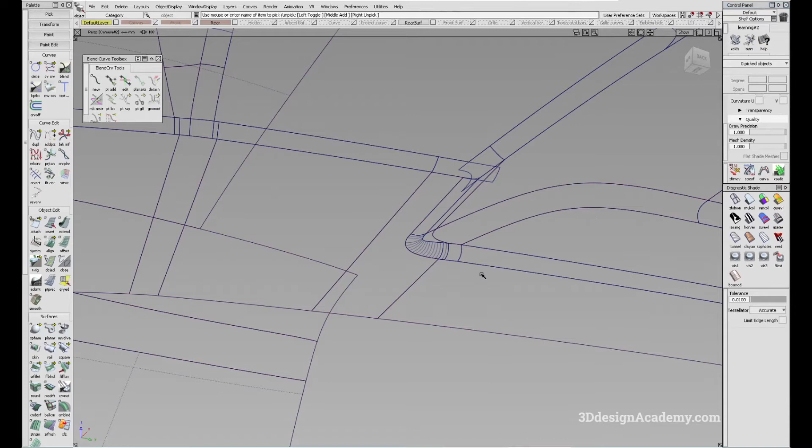In this lesson, we will continue with part 185 of constructing the car project. Okay, so continuing on from the previous lesson, I'm going to be working on this fillet over here. Now, you'll notice that there's this area and this area that we need to work on. I do think that this is going to be a much more difficult area, so I'm going to tackle this one first and leave this for a little bit later.

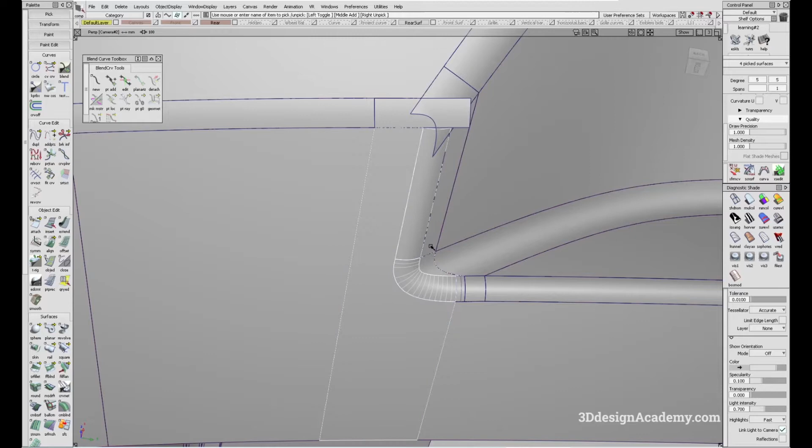Okay, so in order to start, I do want to simplify these surfaces a little bit. So what I'm going to do is I'm just going to grab all these and I'm going to hide unselected so that they're not in the way. And I'm going to do a little bit of modification. So you'll notice that because of the tangent, how this fillet is constructed, it's not lining up. So let me just do a little bit more refinement.

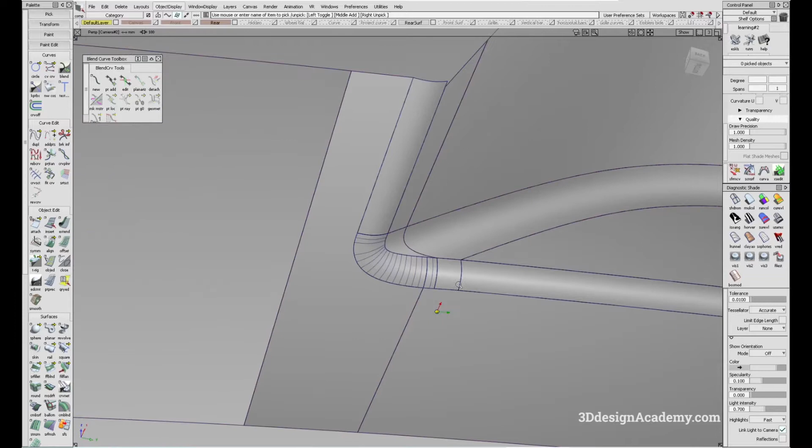I'm just going to grab this one also, and I'm going to untrim this piece over here, and I'm going to untrim this one over here. So you'll notice that the tangent line is a little bit off, so let me just start by cleaning that up. Actually, let me just untrim this first, like this. I'm going to untrim it a little bit more. Oh, actually it's a little bit short.

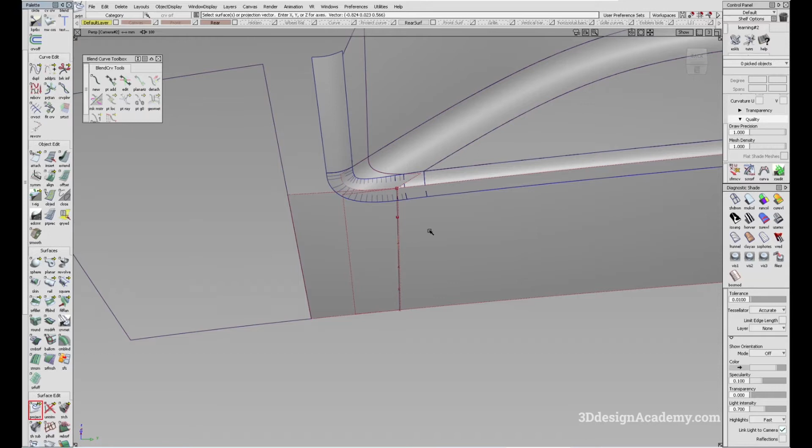Okay, so that's fine. What I'm going to do is I'm just going to extend this piece so that it's a little bit longer like this, and I'm going to get rid of the curve on surface over here, and I'm going to duplicate this one over here. I'm just going to align this piece over here like this, and I'm going to project this one over here, and I'm going to trim. Okay, so that's fine. Let me just untrim and retrim.

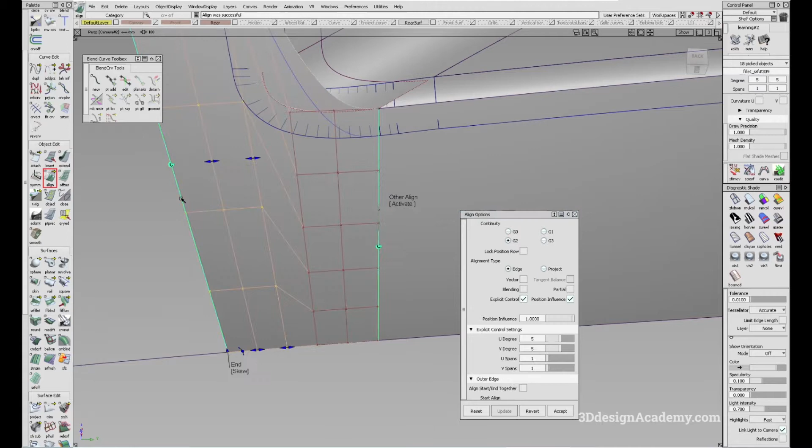Now the current surface over here, I'm going to delete, and I'm just going to trim it this way, like this. Okay, so right now you'll notice that the surface is a little bit long. This fillet is a little bit long, so I'm just going to bring that back by a little bit. And I'm just going to align this piece, make sure that it's good. And I'm also going to align this piece like that. And because it's a little bit short, I'm going to extend it back out like that. So, okay, that's good. And now this fillet is matching up nicely.

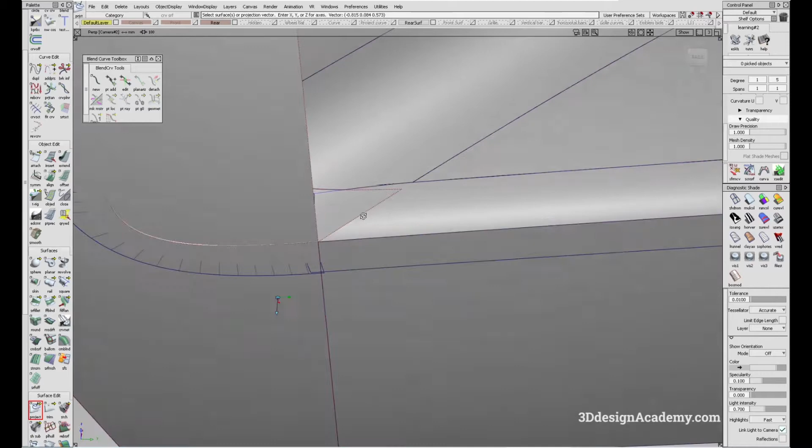Okay, so that said, it's matching up here, but you'll notice that this fillet needs to go like this. So I'm just going to extend this piece over here like that. I'm going to delete the curve on surface over here, and I'm going to project like this. And well, actually, you know what? Let me see if I can just redo the fillet. Now this fillet was a chord length of 5, so let me just delete this piece over here. I don't need that anymore.

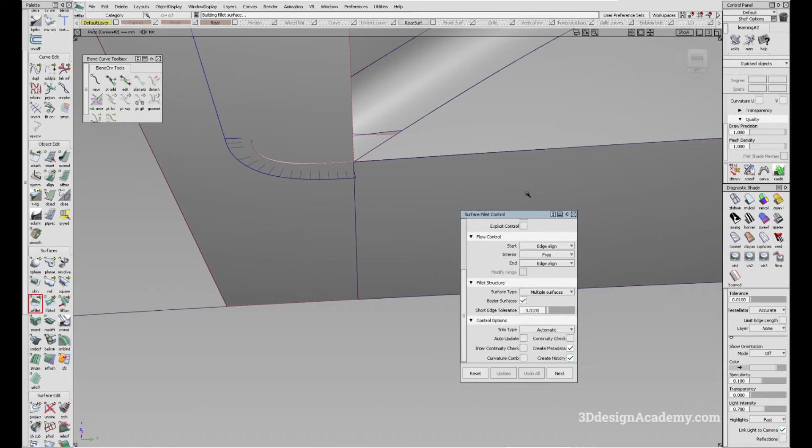I'm going to get rid of this curved surface over here, and I'm just going to do a chord G2, and it's going to be 5, form factor 1. It should be edge align on both sides. I'm going to turn Bezier surface on. And we got a nice fillet over here. Okay, so it's a single span. Everything looks pretty good. And I'm just going to turn the symmetry on, make sure that it is curvature across the center, which it is. So that's excellent. I'm just going to delete the construction history like that. And now let's move on.

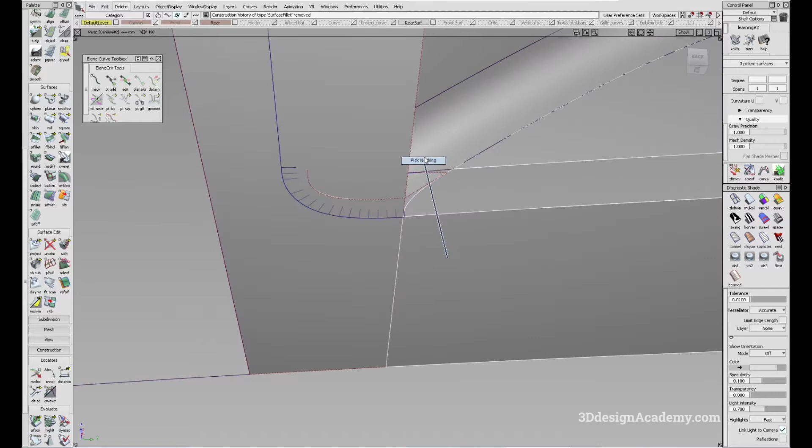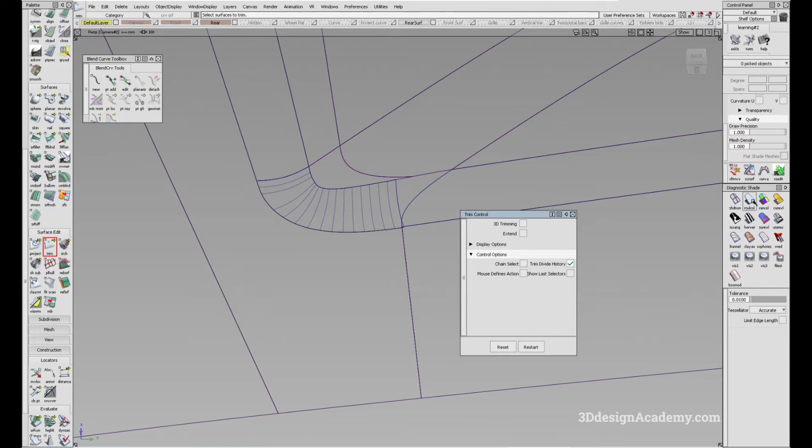Okay, so next thing I have to do is I actually have to create a fillet over here. Something a little bit more difficult about this piece right here is, let me just delete this piece over here and just trim away like this. The problem is, if it was just a single piece, it would be somewhat of a standard ball corner. Even though you would have to manually build it, it would be somewhat standard. But the problem is that there are two surfaces, so that's going to make it a little bit more challenging.

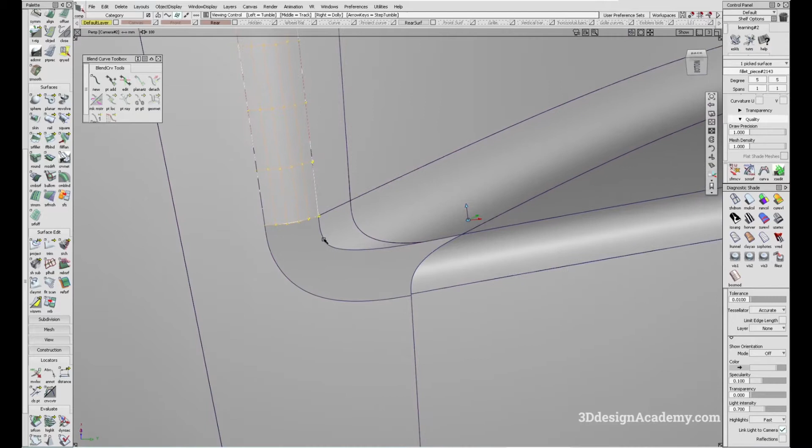However, I'm going to delete this piece over here, and I'm going to try to align this so that everything is a little bit easier to work with. So let me just extend this piece like this, and I'm going to just create a rail. So I'm going to connect.

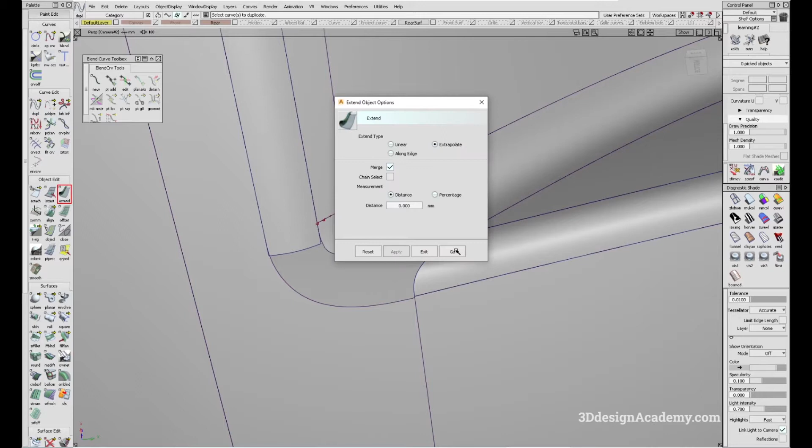Here's what I'm going to do: I'll duplicate this edge, extend this curve like this, and project normal like this. Then I'll trim, or not trim, convert.

This piece I'm going to hide just in case I need it, and I'm going to untrim this piece over here. I'll delete the curve on surface over here, and project align this piece over here, so I'm just going to project a line.

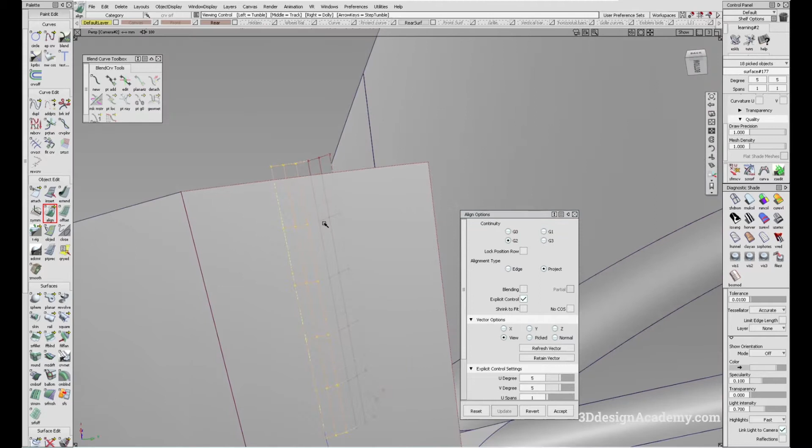It's going to be, oh okay, so it's a little bit short. That's okay, I'm just going to extend this piece like this. Now let's try it again.

I'm going to just project view, should be okay. Let me just trim this piece over here. I'm just going to extend this curve on surface over here, and trim this one over here.

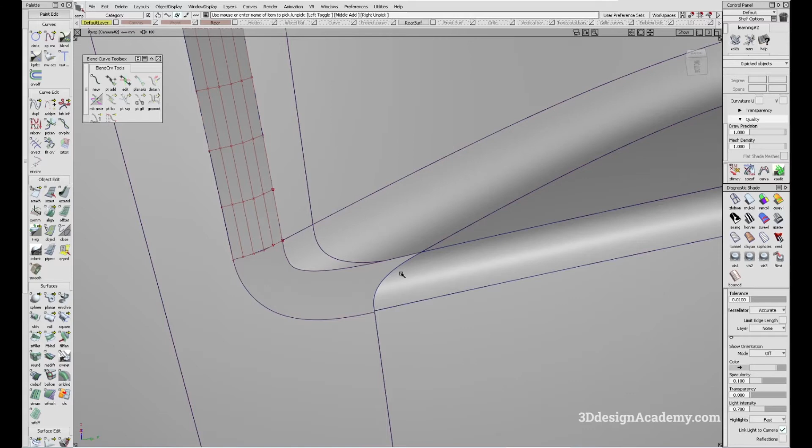Now, here's the challenge: I need to create this fillet over here that's going to connect this one and this one. In order to do so, I think I'm going to try something a little bit different.

So this is the primary surface over here, and I'm going to extend this just a little bit.

So what I'm going to do is extend this piece over here like that, extend this somewhere in here like this, and I'm actually going to grab these two.

I'm going to untrim this piece over here like this, and untrim this piece over here like that. Now the curve on surface, I'm just going to delete for now.

And I'm going to do the same thing over here, delete this curve on surface and this one over here. I'm just going to hide it for now. Okay, this curve on surface.

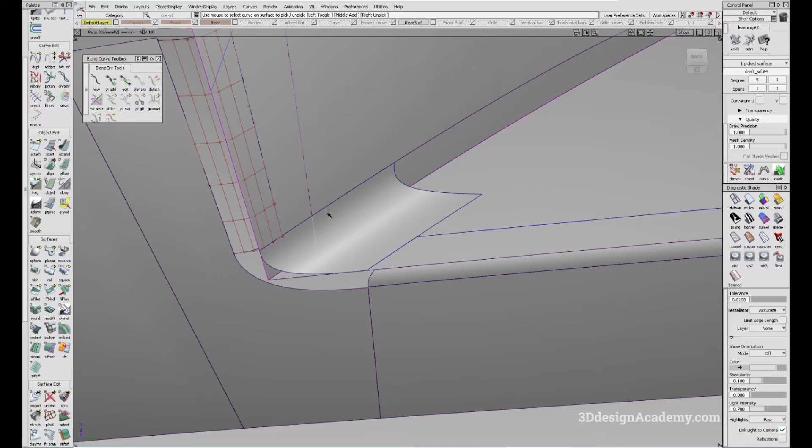Well, let's get rid of it for now. And I'm actually going to hide this fillet also, like this.

Okay, so here's what I'm going to do: I'm just going to create a curve that connects between these two, and make a ball corner. Not a ball corner - I'm going to do a trim convert on that one.

In order to do that, I'm just going to do an insert. It's going to be a curve on surface over here. I'm going to just snap it somewhere over here - it doesn't have to be super exact.

I'm just going to duplicate, get rid of the curve on surface over here, and align this piece over here like this. Make sure that's a curvature, and align this piece over here like that.

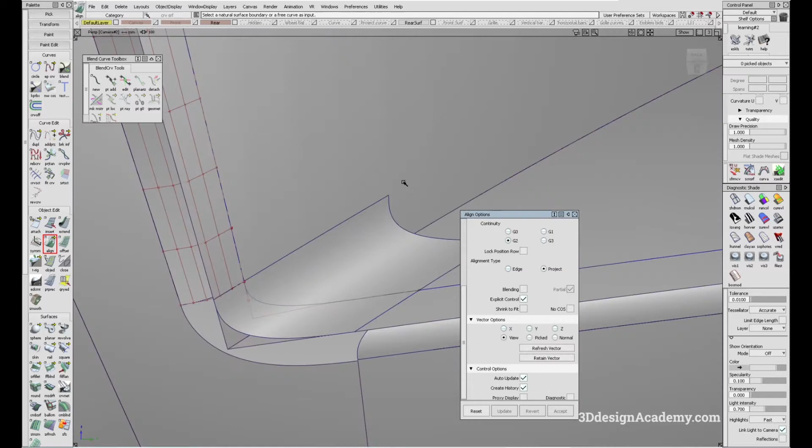I'm just going to make sure that the CV structure between these two are the same, so a little bit extension here and a little bit extension here so that they are matching. This one on the other end looks pretty good, so I think I can leave that as is. Now I'm just going to do a project over here, and a trim convert here like that.

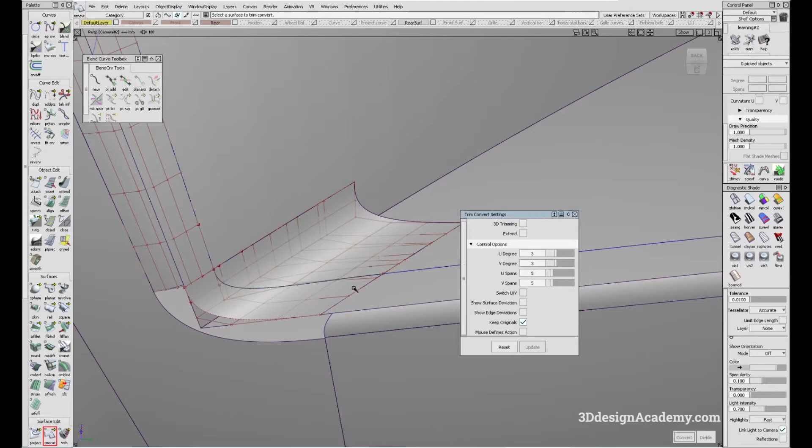Okay, so that's good. I'm going to get rid of the curve - well actually, I might just keep it. Let me just hide it over here. So now this piece I can also hide, and I'm going to just align this one over here.

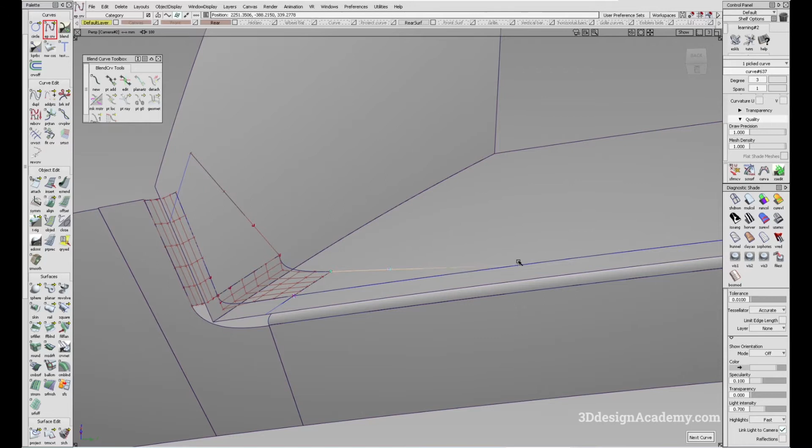Now, because it has to be edge aligned, I do need to trim these surfaces. I'm just going to roughly trim it, grab it like that. Now this side really doesn't matter, so I can just roughly make sure the patch is okay. I'm just going to trim this piece over here like this.

Oh, it looks like we need more curved surface, so I'm just going to extend this curved surface like this over here. Okay, it looks like it's a little bit off, so let me just use... well actually, you know what, let me just do a fit.

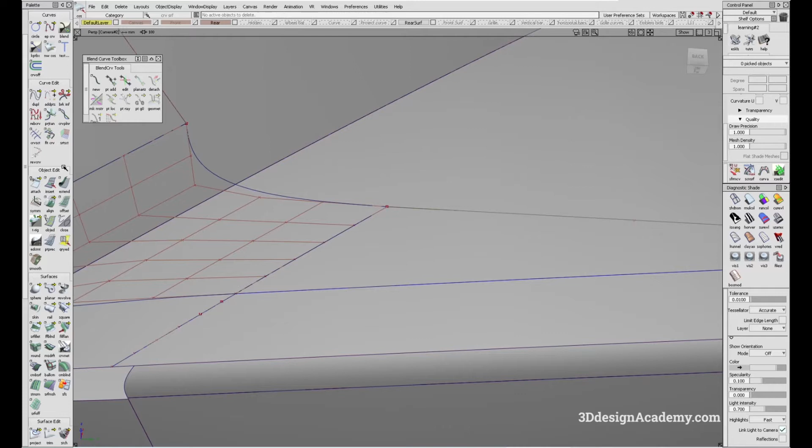Well, actually, you know what, I'm just going to do duplicate. I'm just going to extend this piece over here like that, this curve, and project like this. I don't need that anymore, so that can be gone.

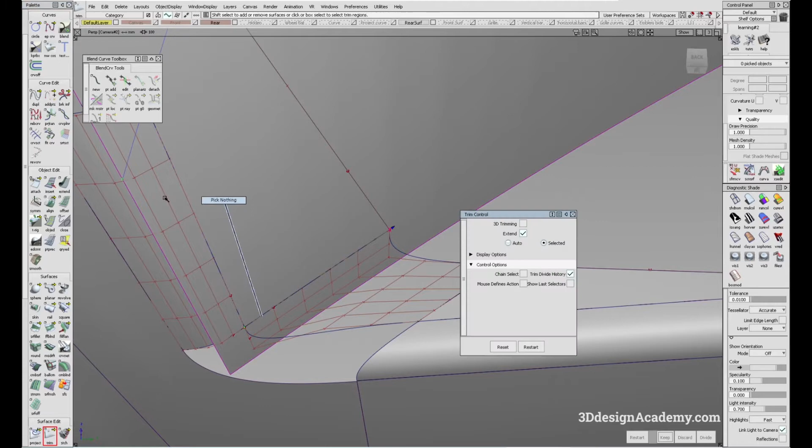And I'm going to trim this one over here, and do the same thing over here. I'm just going to trim this piece over here, and I'll have to project this one also. I'm just going to trim this piece, and that looks good.

Okay, so now let's do some align - it's going to be G2, edge over here. Now this one you don't want to touch - I mean you can, but it doesn't really do anything for us.

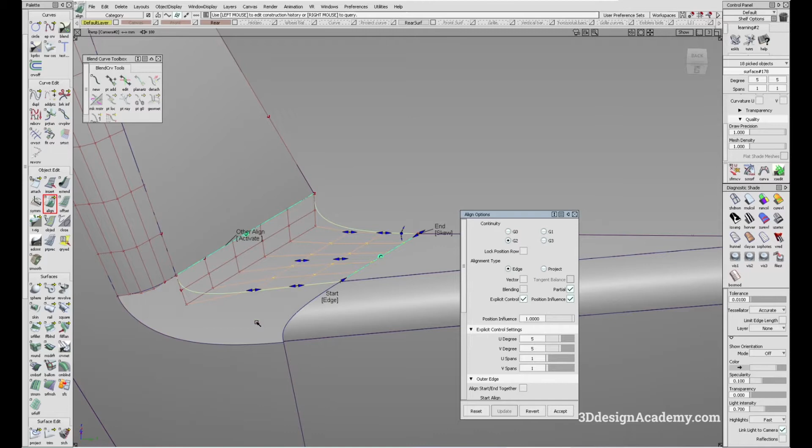And I'm going to do the same thing over here, edge over here. So now we know that it's curvature on both sides, and the edges are aligned. So that's ready to go.

Okay, so now let's create this curve over here. I'm just going to untrim this piece over here - not untrim, get rid of the curved surface over here. And I'm just going to duplicate the curve.

Well, actually, you know what, I'm not going to do that. I'm just going to grab all these. These curves can be gone.

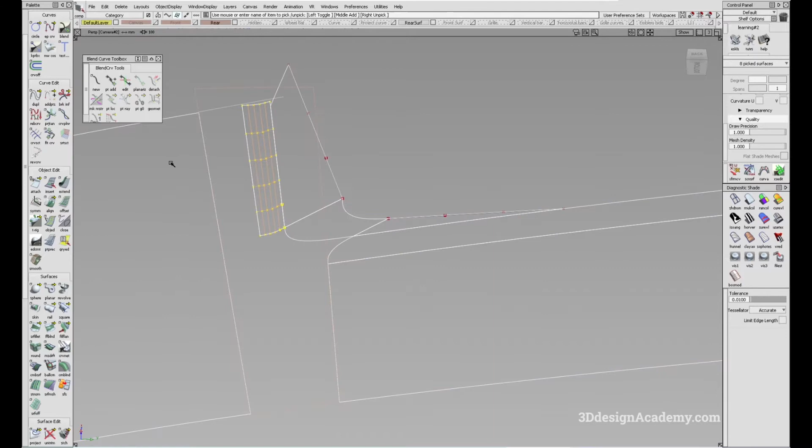I'm just going to grab all these curves or surfaces. Did I delete them? Or did I just hide it? Okay, so I just need this edge, so maybe I'll just use that.

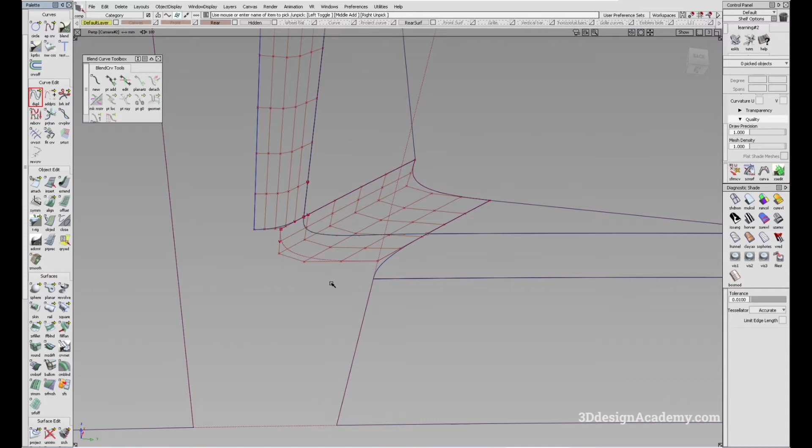Okay, so I'm just going to duplicate this edge. I'm going to say hidden. That's good, I can get rid of it. That's not a problem, I'm just going to align. Actually, let me just align it over here or snap it over here.

I'm just going to extend this piece like that. I'm going to extend it back so that the length is the same, and I'm just going to align. So it's going to be G2 on this side, and it's going to be G2 on this side.

And now we are ready to make a square. So it's going to be 1, 2, 3, and 4. Now let me just make sure that this is aligned.

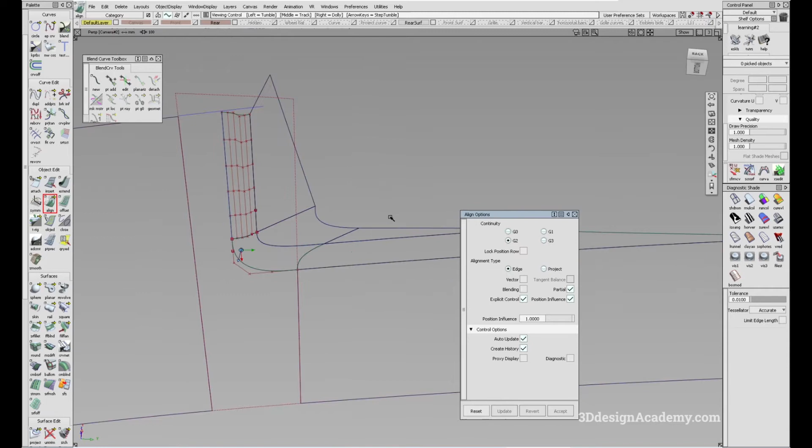So I'm going to grab this piece, it's going to be edge. I'm going to grab this piece, make sure that's edge. Oh, that's not good, okay, so I'm just going to leave it like that. And looks like that's not good either. Okay, so I'm pretty sure I aligned it, so I'll just leave it like that.

Okay, now I'm just going to do a square. So, actually, a square is already made. So 1 is going to be curvature, 4 is going to be curvature, and 3 is going to be curvature. Now, it looks like it's a little bit messy, so now I'm going to do explicit control.

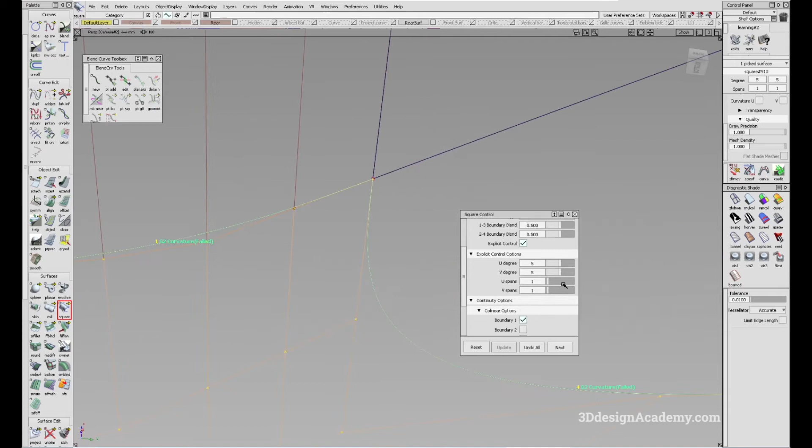Continuity options on, 1, 4, and 3. The surface looks like it's not making curvature, so let's find out why. It could be because the surfaces are flat.

If you notice, I think this one is flat. This, I believe, even this one is flat, so I think that's probably the reason why it's doing this. But let's do a continuity check. Okay, so I don't know how much it's failing by, but looks like there's a little bit of curvature deviation going on there.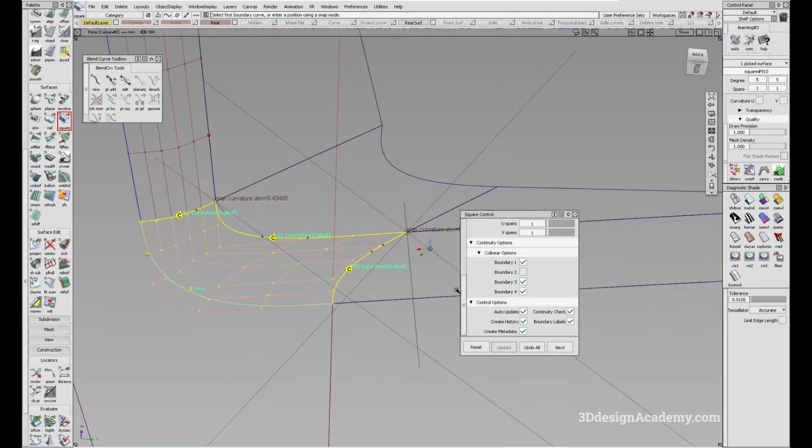That said, however, I do want to make sure that the CV structure is a little bit better, so let me just do that. And let's find out one by one how much it is off by. So that's off by 0.40. That's 1.0, so I think that should be okay.

It's not perfect, but let's try this, try to match this a little bit better. Okay, so I'm just going to grab this one like this, and I'm going to grab this CV over here.

In UV, I'm going to set it to 50,000 so that I can do a little bit more sensitive move. Looks like it's going the other way, and I think I actually need to do 5,000. So let's see if I can get it to be curvature.

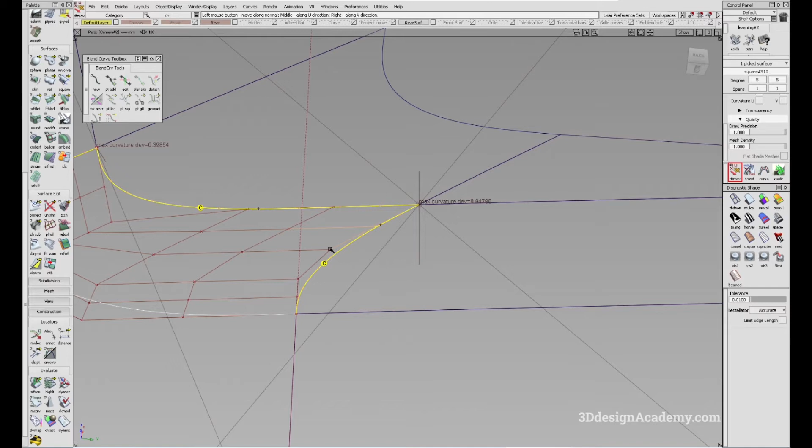Okay, so it's trying to fail tangency. Going the other way, okay, so we got curvature there. It's 1.0, so I'm not going to touch that point. And I'm going to do the same thing over here.

Just going to grab this one. It's curvature over here, I think that's actually failing a little bit. Let's see. Okay, so you know what, I'm just going to leave it. Actually, you know what, let me see if I can just do the same with the curvature over here.

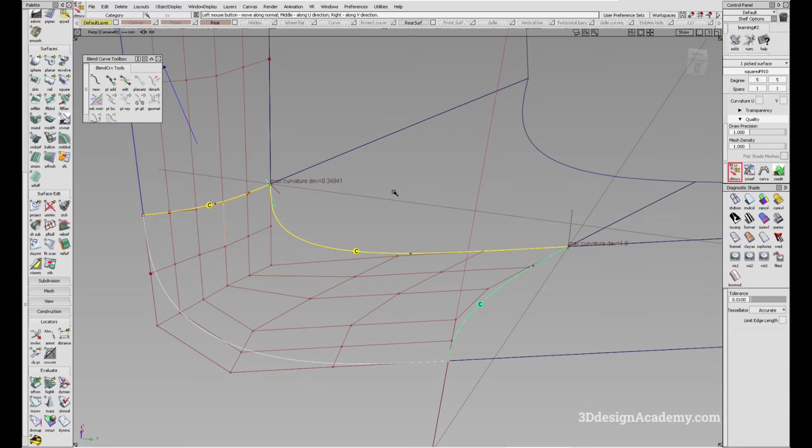No, that's not working, so I'll just change the tangency CV over here. Okay, I would say that's good enough. And I do need to make sure that this is also good. So I'm just going to align, project.

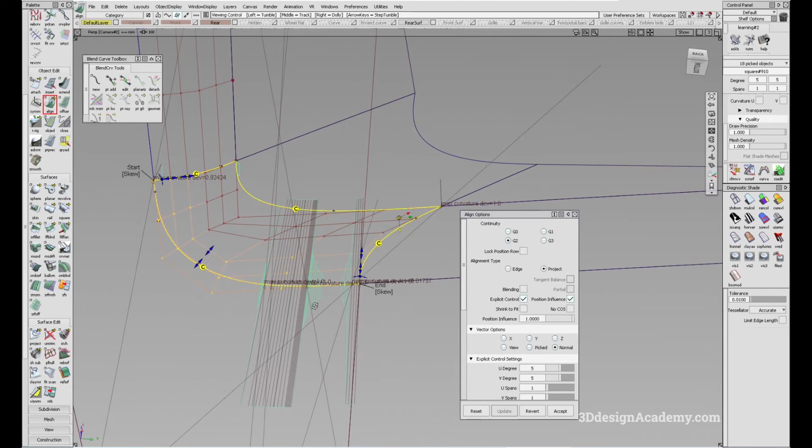It's going to be normal. Okay, so it looks like we got a bunch of issues over here. Okay, so at least this side is 1.0, so I'm going to just leave it. That's, I cannot say the same thing about this one over here.

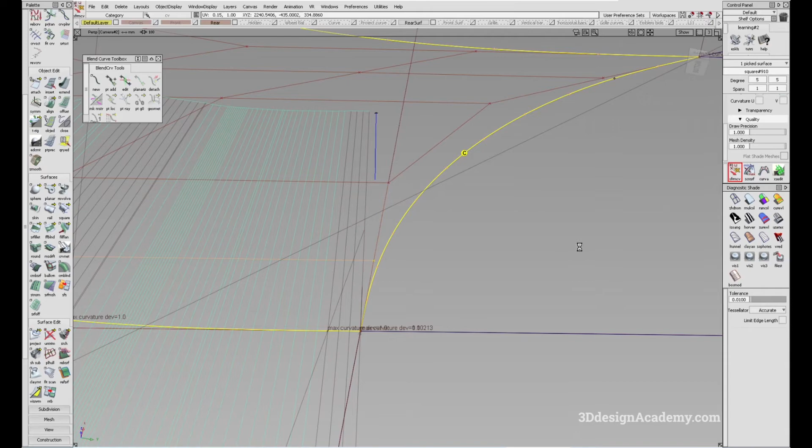So let me just grab this CV like this and try to get this to line up. Okay, so we got curvature there. It's 1.0, so I'm not going to touch that. And this one looks like it needs a little bit of adjustment. So let's...

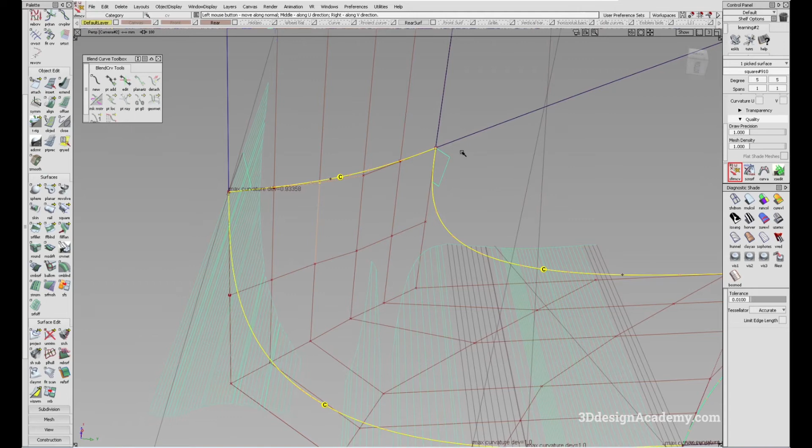Okay, so it looks like it's starting to fail. I don't know why it would be failing by that much, but I don't think this is gonna work. So I'm just gonna leave it like this. I know it's not perfect, but let me just check the highlight and see how it looks.

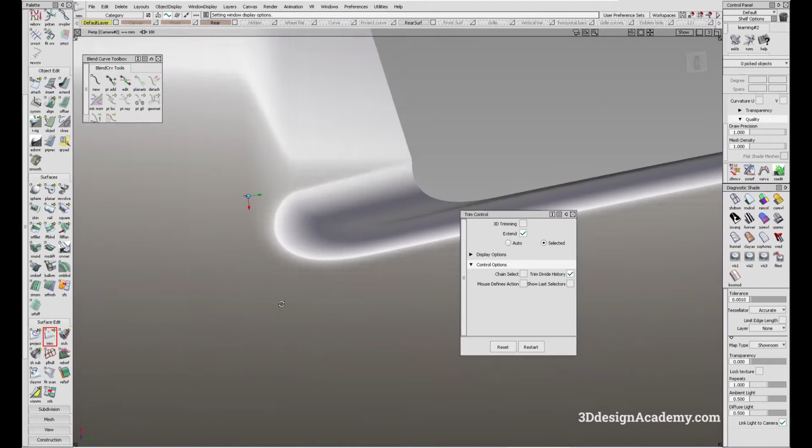Highlight wise, I think it actually looks pretty good. Let me just reduce the tolerance a little bit more, and you'll see that it's actually really smooth. So the problem, while we have the continuity as far as the number goes, it's not perfect, but I think this is actually not that bad.

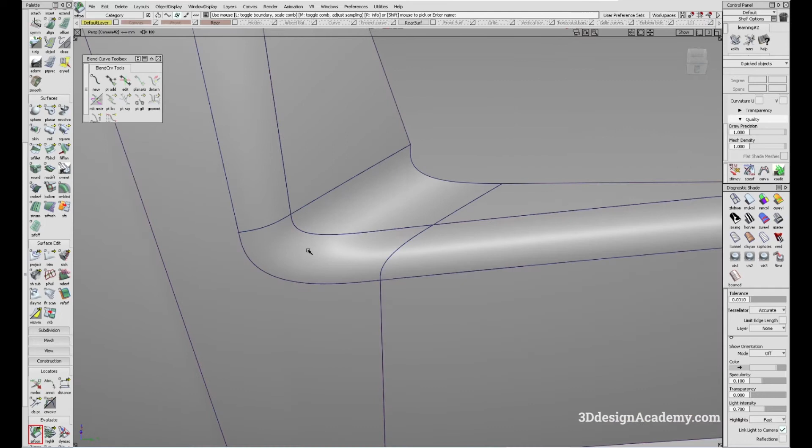It's 1.0 here. We were able to achieve curvature here. So I believe this is curvature, and this is curvature, or it's supposed to be. It's 1.0, so I'm just going to ignore. That said, however, I do still need to adjust for this one.

So first of all, what I'm going to do is, well, actually, I think I should trim this away. So let me just project like this, and I'm going to trim this one, and make sure that... okay, that's an issue. Okay, so it's actually tangent, which is not what I expected.

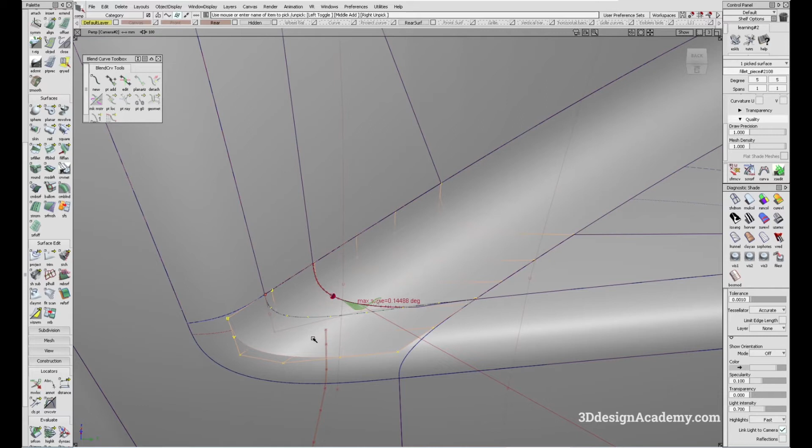So let me just put this in the hidden layer, and I'm going to bring this one back. The only problem is, if that's the case, I believe this might be a bit of an issue as well.

Okay, so let me just delete the curve on surface over here, and I'm going to just project over here, and make sure that this one is okay. So I'm going to say normal. This one I'm going to say normal as well.

I'm going to check the continuity, and it looks like it's failing. Okay, so what I'm going to do is just trim this piece over here like this. And this one I'm going to copy and paste over here like that. And now I'm going to detach this piece over here.

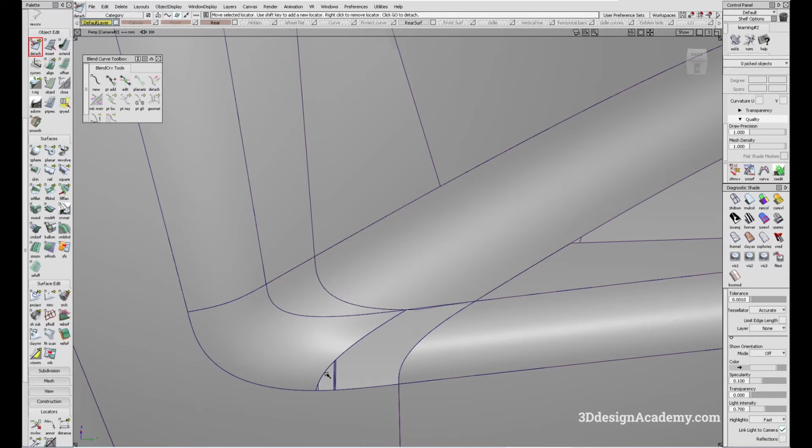So continuity is going, I'm just going to do that, and make them into separate pieces like this. Okay, so that needs to be adjusted, as long as it doesn't crash. Okay, so I'm just going to change that to 0.01 instead of 0.001.

I'm going to save for now. Okay, so now let's see if I can get this to work out. So this actually needs to be curvature, or at least tangent.

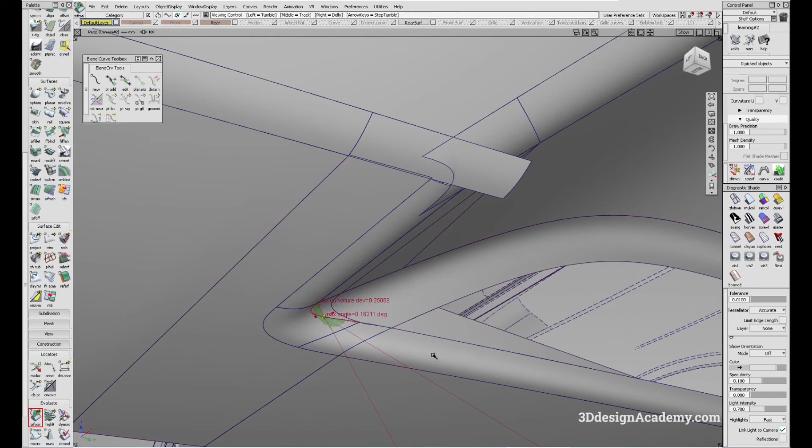First of all, let me just isolate the surfaces like this, and this one, and this one. I'm going to say hide unselected. And right now there's a little issue over here. I think because it was actually aligned to a trim converted surface, it's not actually working as well as I had hoped.

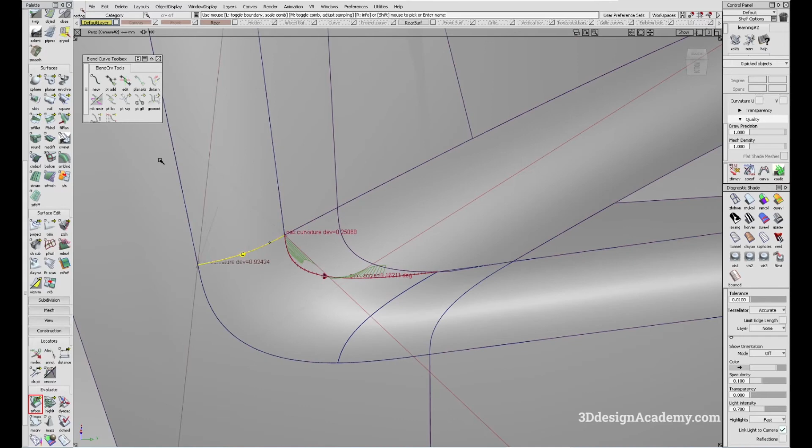Okay, so now I'm just going to align this piece over here like this. Okay, so we got curvature there, so that's good. And I'm going to see if I can get curvature over here. Oh, we got curvature over here, so we got two sides as curvature.

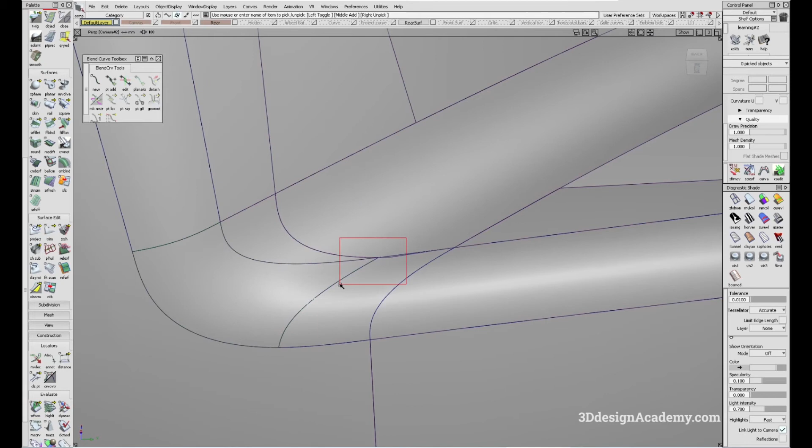That's 1.0, so I'm just going to ignore. That's actually pretty good. So let's do this side. Okay, it's curvature over here, but the problem is it actually has to fit curvature over here.

So let's try it. I'm just going to delete that. I'm going to make sure that this is, it's 1.0, so I'm going to ignore. And this one I'm going to just... okay, so looks like that's a bit off. So at least we got tangency.

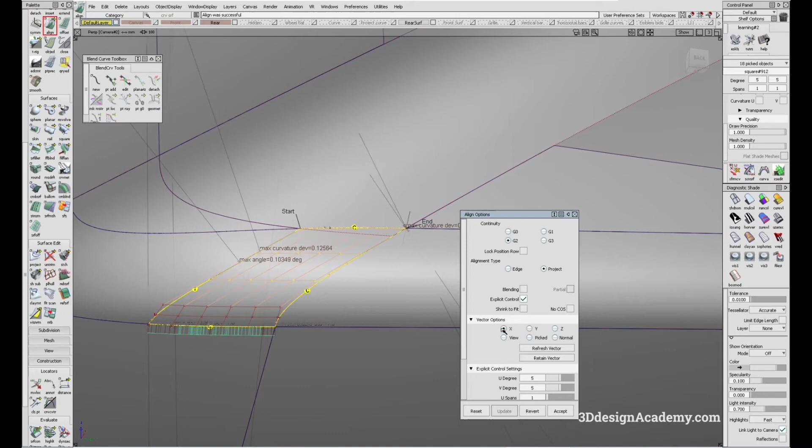Okay, so I'm going to say X. Y is not going to work. Z, nope. Okay, so I'm going to just say view, and let's see if I can.

Now, it is kind of inevitable because of the CV structure, how the CVs are structured. That said, however, I'm going to try to fit it as much as possible. Okay, so I'm just going to delete the construction history over here.

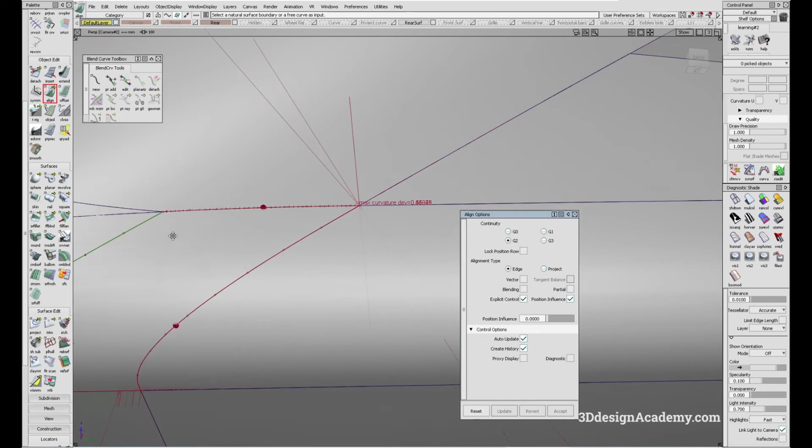It's failing curvature over here, so let me just try to get that adjusted first. So I'm just going to grab this one, align, and try to align this piece to over here. I think that seemed to have worked. So that's good, so it's only this corner that needs to be adjusted.

So let me just try aligning this piece to over here. At least it's lined up over here. So it's this one that needs to work. So let me just grab this tangent CV. Oh, there we go.

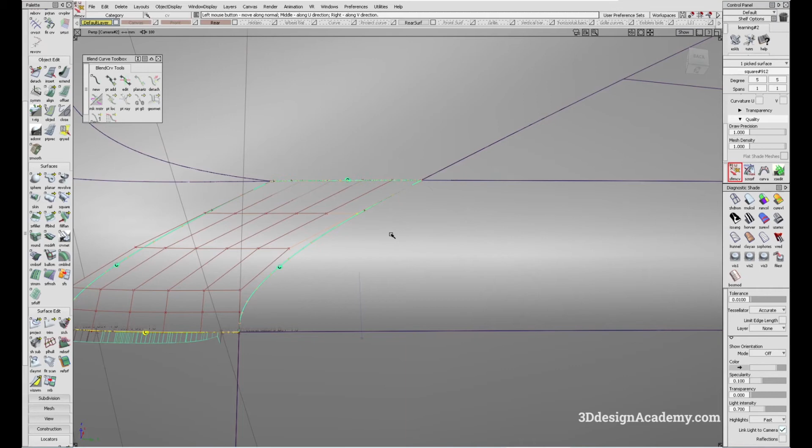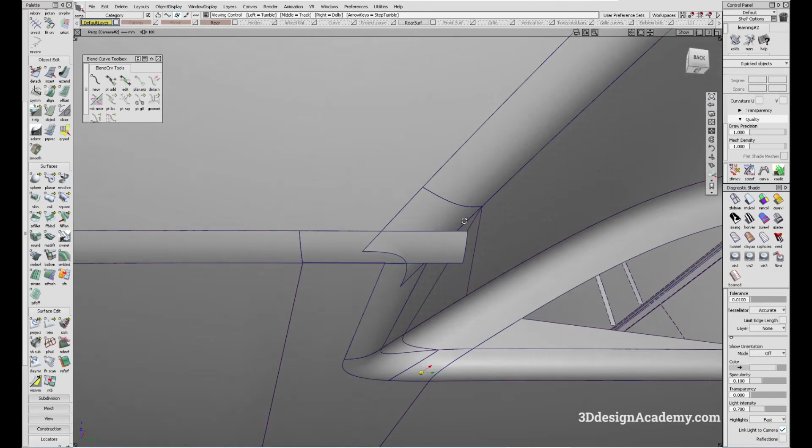We got curvature. That was actually a lot better than I had expected. Highlight looks pretty good, and we got curvature on all sides. Except for this one, but it's 1.0, so I think I can ignore that one. Okay, pretty happy with that. That was a very difficult area, but I was able to make it work, so I'm pretty happy with that.

Okay, so that said, however, this all needs to be adjusted. So let me just project like this, and I'm going to trim this piece, and let's see if the continuity is still good. It is, and this one should be relatively easy.

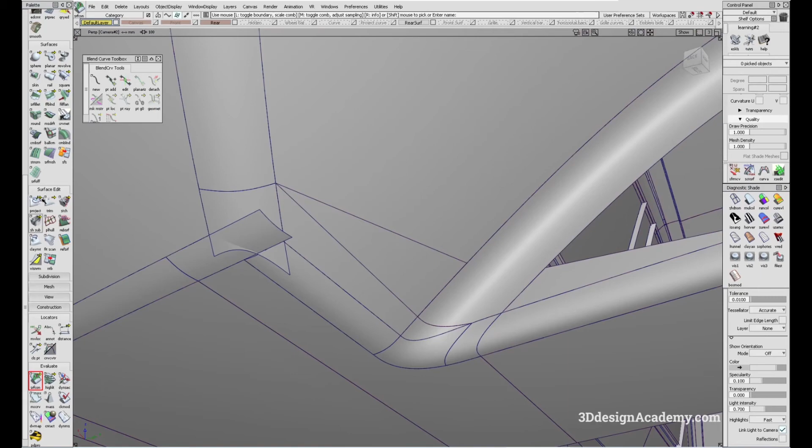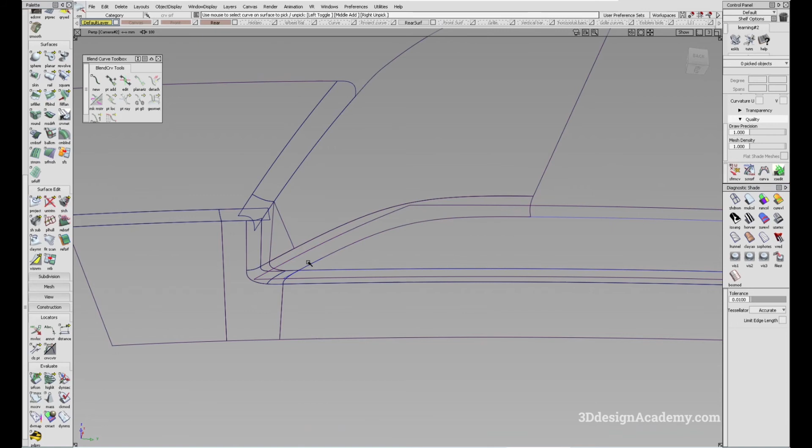Actually, before I do that, let me just do a little bit of cleanup over here. First of all, I'm going to turn symmetry off. And I'm going to grab all these surfaces and say hide unselected so that the surfaces behind are not in the way. I'm going to untrim this piece over here, and I'm going to get rid of the curved surface over here.

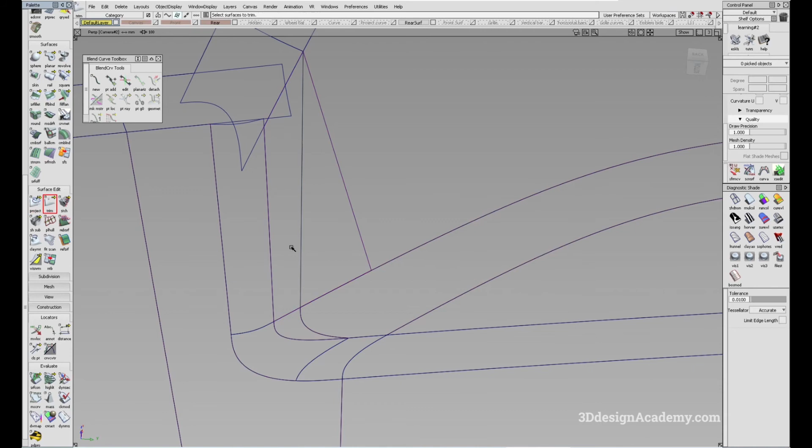And I'm just going to project using this one over here, and I'm going to retrim. So that's good. And let me actually get rid of this curved surface too, because I actually don't need that. Okay, so the same thing over here. This one, I should be able to just do that and be done with it. Okay, so that's good. Let me just delete the construction history over here. And now let's do some ball corner.

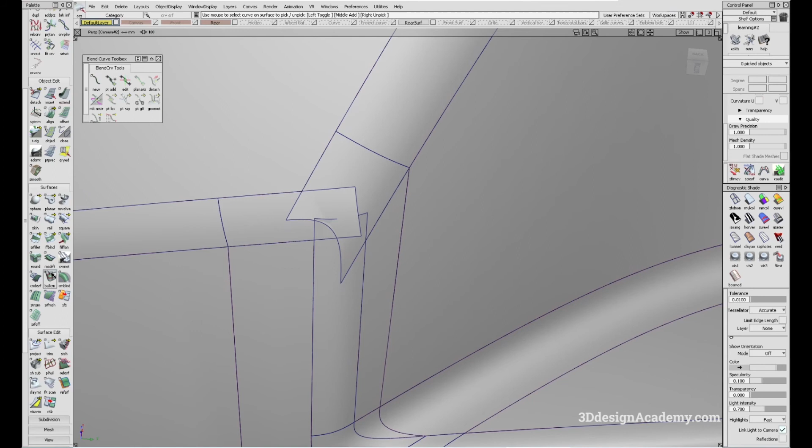First of all, right now this is way too long, so I'm just going to extend it back a little bit. This needs to be extended a little bit. And let's see if I can do a ball corner over here. So I'm just going to grab this one. It's going to be corner 1, 2, 3, and this is going to be the 4th corner, and it says 3 intersections found. Select 2.

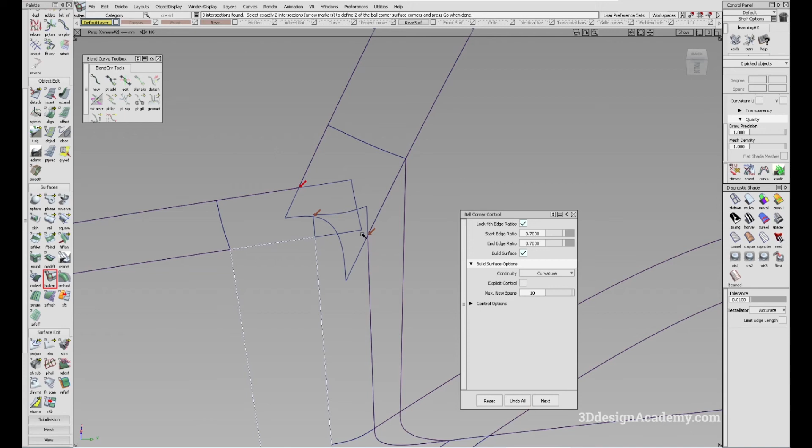So you just want to make sure that it is an actual intersection, not some random spot like this. The intersection between these fillets will be this one and this one. I'm going to say go. Okay, so looks like we don't have history, but that's okay. As long as you are within the tool, it should be okay. So right now we asked for curvature on the sides, but you'll see that there's a little deviation.

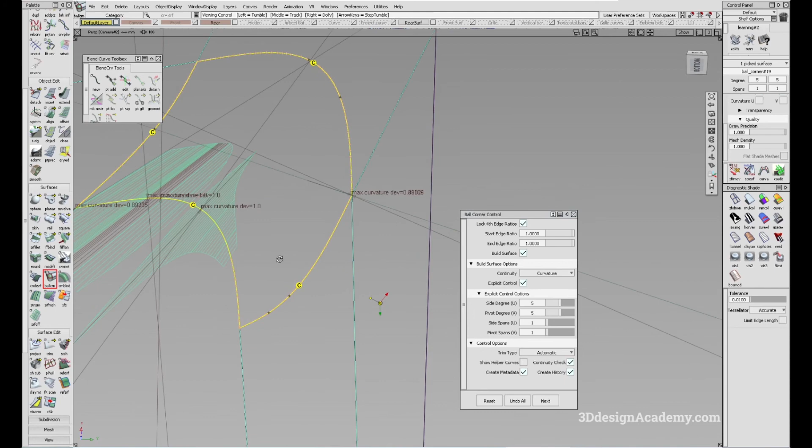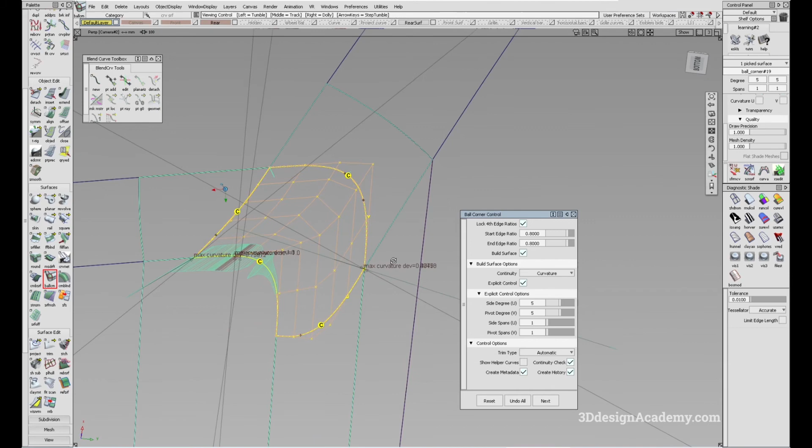Let's see, 1.0, 0.8. So I'm going to go the other way and see if that makes a difference. Not really. Well, actually this might be the best one so far. The CV structure is a little bit funky, to be honest. So maybe I'll just go a little bit more. Okay, so let's try align. I'm just going to grab this one like this, and align this one over here. So we got curvature there, and I'm going to see if I can get curvature here. It's going to be partial.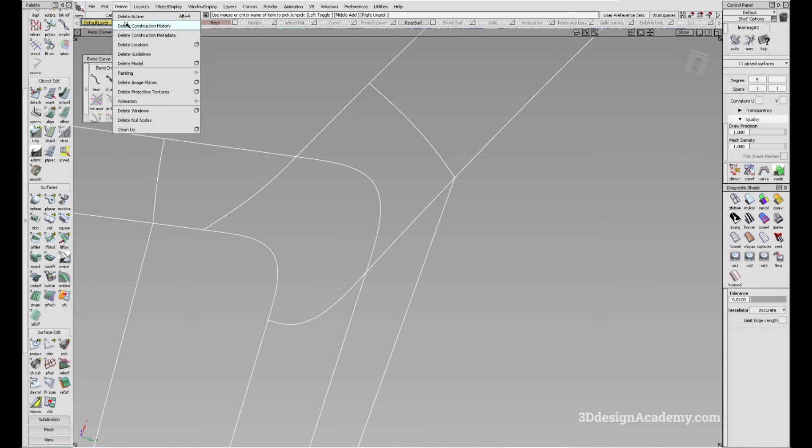What is going on? I'm going to say revert, and I'm actually going to delete the curve and construction history like this. And oh, actually, you know what? I think I need to untrim. So I'm going to untrim all sides, and I'm going to align this one over here like this. It's 1.0, so I'm just going to ignore. And let me just check the continuity over here. It's not curvature, so let me just do that again.

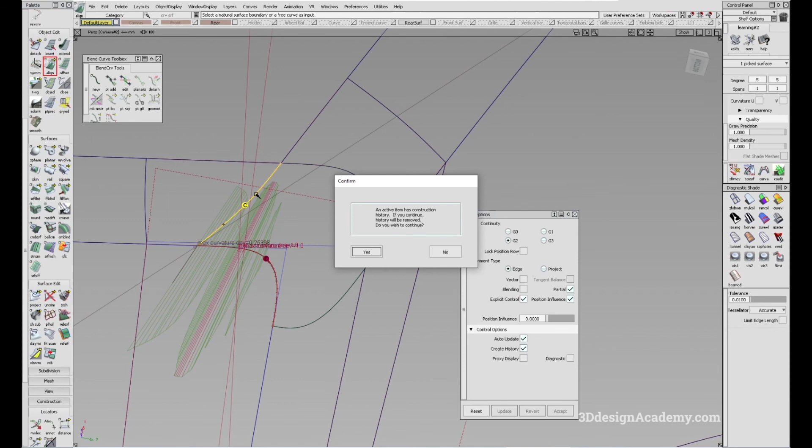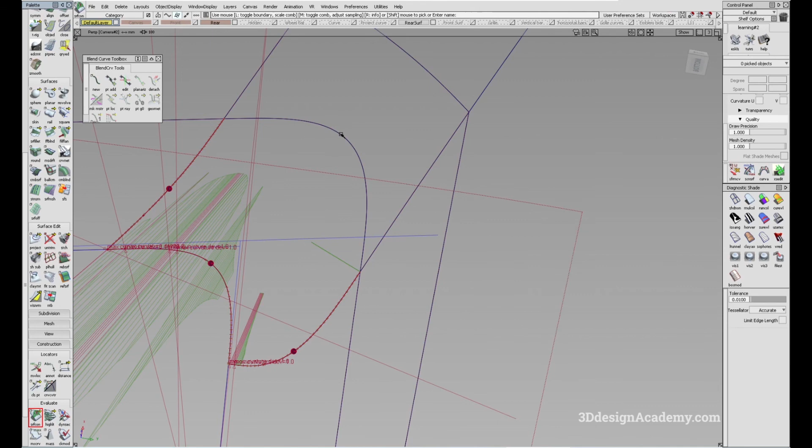Curvature. It's actually failing. Okay. So let me try that again, but let me just get this to work out before I do that. Okay, so I'm just going to align this side like this. That's actually making it worse, so I'm just going to say revert, and I'm going to check the surface continuity over here, and see if I can just hand manipulate that a little bit. So I'm just going to grab this CV over here, and let's see if I can get this to work.

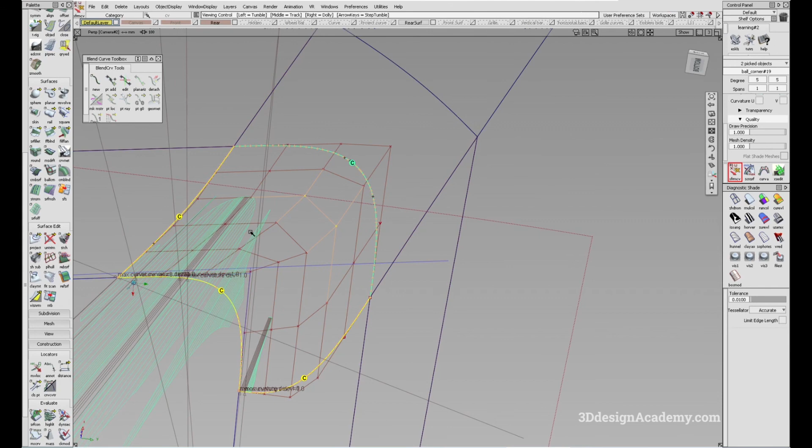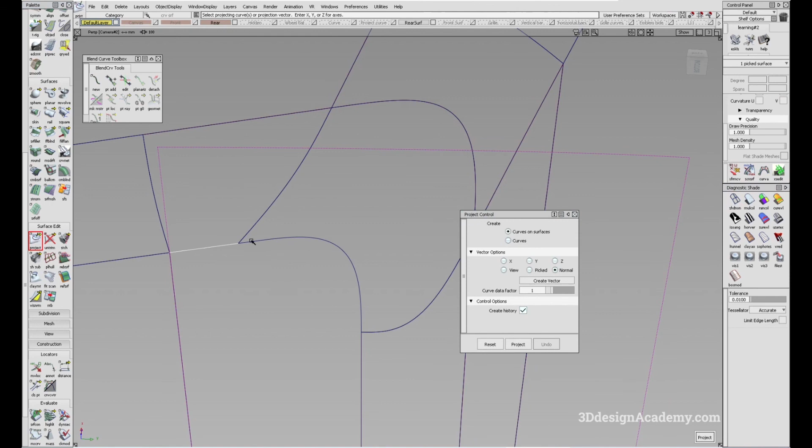I think I should be able to get curvature without too much problem. So it's curvature over here. I know it's not curvature over here, but let's grab this one and just do a little bit of adjustment there. It's curvature there. And the others are 1.0, so I'm just going to ignore it and call it done. To be honest, the fillet is actually not that structurally great looking. However, at least we got the continuity, and I'm pretty sure the highlight is going to look pretty good. So I think I'm just going to leave it for now. Yeah, the highlight looks excellent. So I would say that's good enough and just move on.

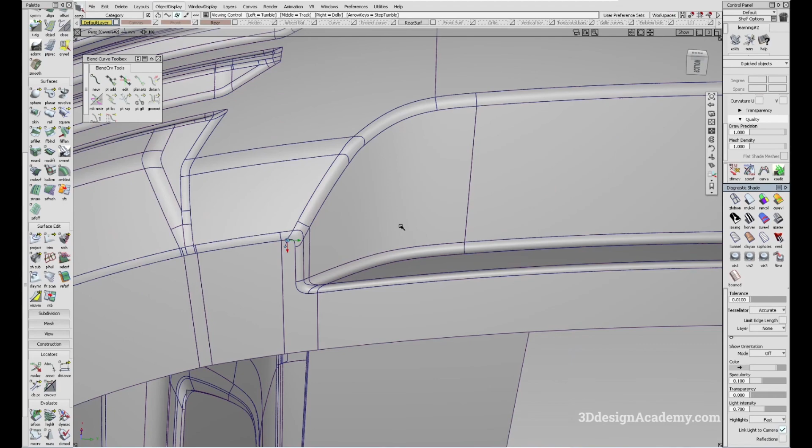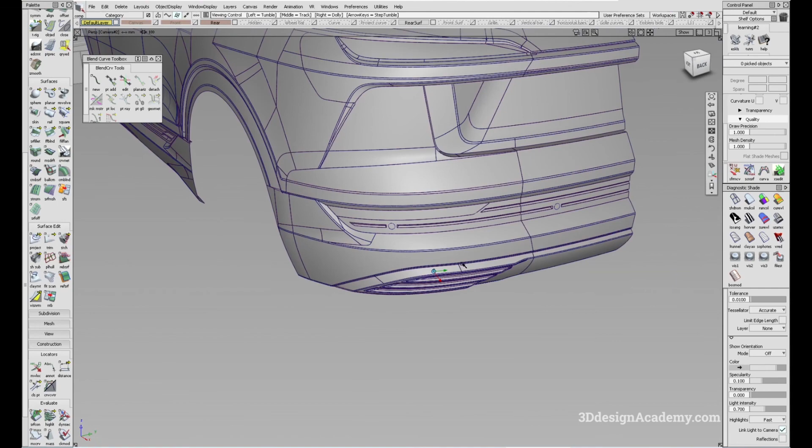Okay, so let me just delete the construction history over here, and let me just bring everything back on. Okay, so I think that looks actually quite good. We got the fillets on. And I think that's about done for the main fillets. Now I still need to put these minimum fillets on, but I think that they are a little bit less critical than some more prominent features like this. So I would say that's good.